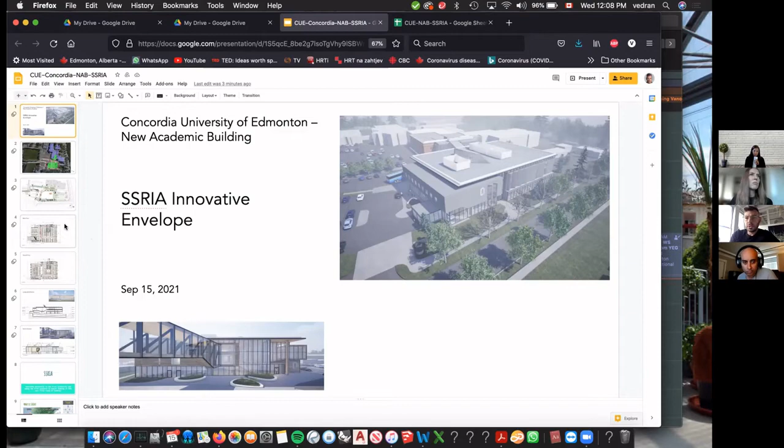Okay, so this is a project we call Concordia University of Edmonton, new academic building, and it's a building on their site, their downtown Edmonton site, right near - if you're familiar with Edmonton - this is how, I'm assuming you can see my cursor, this is how you would enter the Concordia campus, and then it would be right here on your right side.

Your most familiar entries to Concordia are probably here at the whole academic center and alumni hall and so on. So what we are working on is this NAB, or new academic building, which will be connected with this bridge to another building called Quad, or Quadrangle. And we are designing NAB.

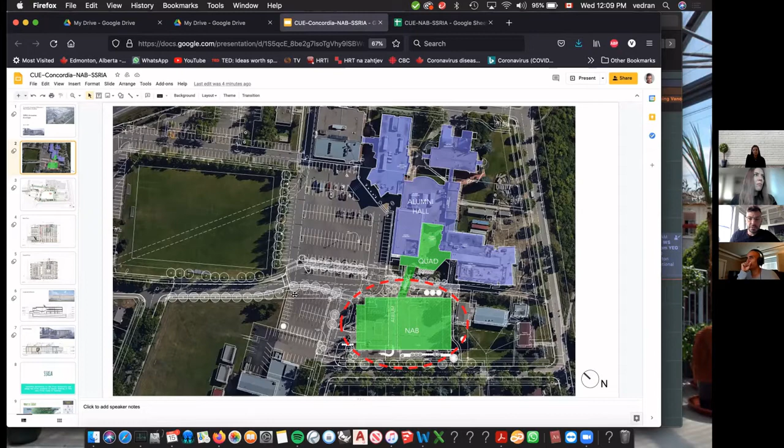Quad is designed by Neifeld Architect, who is also a prime consultant on the overall project. We are working on the site and also with the neighbors on engagements and on the rezoning of all of the site.

This is how the site looks like, and pretty much the scope of work. The building will be full of classrooms and fun places for students to gather, with bridges and stairs everywhere, two larger halls tucked in the middle that create some interesting sectional opportunities, as well as a two-story underground parkade with about 120 car stalls. The building is split level from 2 stories to 3 stories, about 12 meters tall.

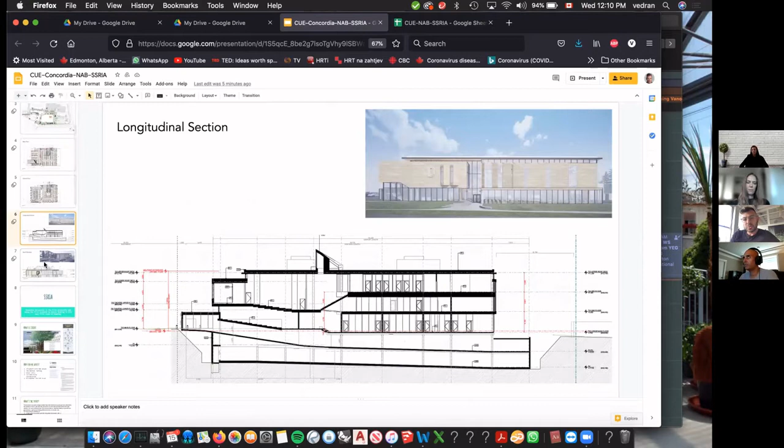Altogether it's just over 100,000 square feet. Out of that, 60% would be above ground and 40% below ground. Here's another elevation and section showing the experience of the building as you would see it walking from the main campus to the building.

So when we first heard about SSRIA, we were very excited about what this opportunity might be for the project and for the university. We knew that this might be one of the first projects to secure that round of funding, and it would be a great story to help position Concordia University of Edmonton. We should always be careful that Concordia University is another university also in Montreal, so this one is Concordia University of Edmonton, CUE for short.

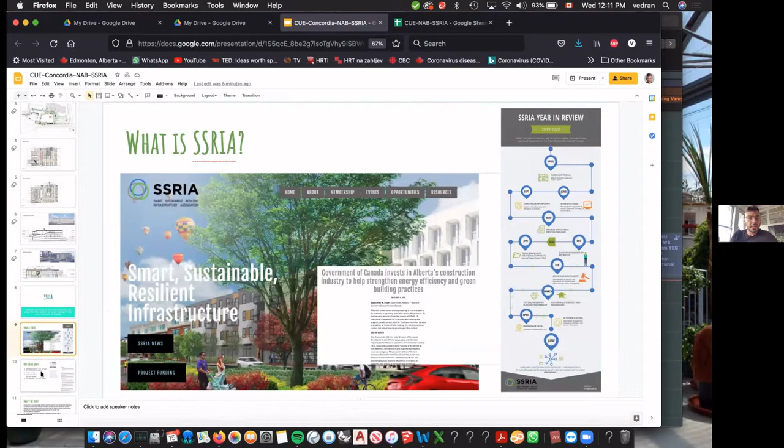They really want to position themselves as the leader of sustainable design in the community, and this is an important project for them. SSRIA stands for Smart, Sustainable, Resilient Infrastructure, and it's a non-for-profit, publicly funded initiative to support innovations with the goal of reducing greenhouse gas emissions and lowering carbon in general, as well as the embodied carbon.

Thinking about that, we needed to have a clear idea why to even apply. We need to make sure that what we are applying is aligned with Concordia's values. We understood that this would be incremental funding to improve the budget we already have to create this innovation. We knew that this would be a great story, and that it would create a lot of collaborations. It would support local businesses, and it would provide educational opportunities for Concordia to actually implement into their curriculum.

As such, we wanted to focus on the weakest component of the envelope, which is always the openings or glazing.

I won't bother you with a lot of details, but just to give you the CliffsNotes on some of the options that we were looking at. The first option was a high-performing curtain wall with integrated photovoltaic cells in addition to vacuum glass. We were excited about looking at a product we are very familiar with, that we helped launch in the market called GlasCurtain — a fiberglass-based curtain wall, which actually achieved the Passive House standard, and is one of the best performing products in the whole world.

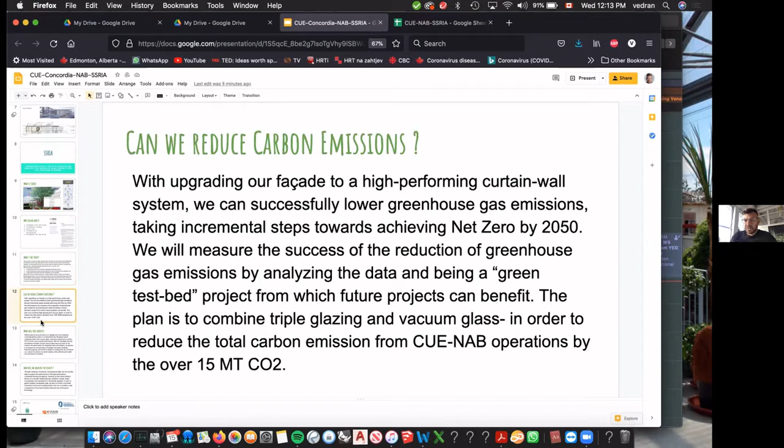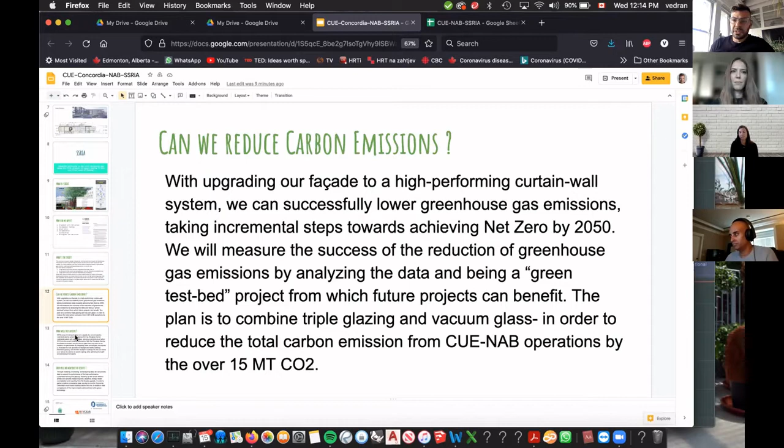Knowing how much better the vacuum glass units would perform, the biggest question was, could we get it in time? Will the client have sufficient support in maintenance? And will the price be competitive? So practically support and time, and how much would that product actually create savings or reduce our greenhouse gas emissions — as well as not to forget how much the fiberglass curtain wall reduces the embodied carbon expense on this project, simply because we're not using metal, such as standard aluminum curtain wall, for example.

So we based the performance of our curtain wall on a baseline, and for that we used two different standards. One is the basic NECB prescriptive method performance of the curtain wall, meaning if we were not to have funding, what could we get away with? Meaning there's the same story — there's not enough money, there's no budget to do something innovative, and this is not the battle we want to fight now. So let's make sure the client invests the minimum in the glazing, for example. For that, you could get away with something like USI standard values — the resistance properties factor of the assembly of 1.9, just for the order of magnitude.

What we are achieving with this product is 0.63, including the thermal bridging — that's the overall effective performance, and it's also quite substantially better than the best. Our second reference was the comparison with how well the best aluminum curtain wall system would perform on the market, and that one dropped us to 0.95 USI value.

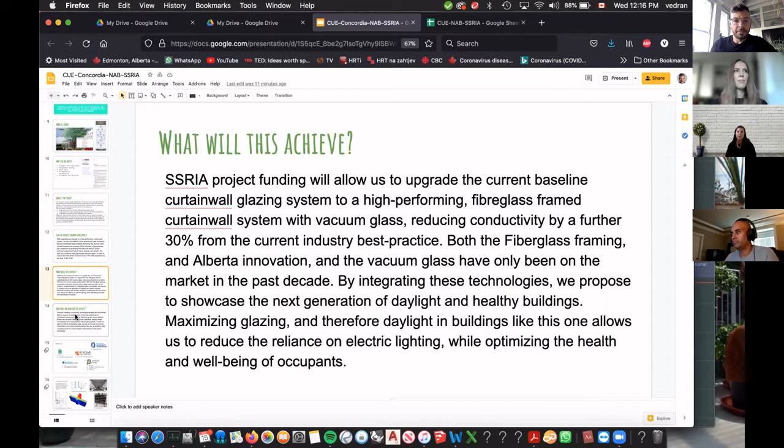So we go from something that's a minimum required by code in an energy code prescriptive method, which would be 1.9, to what's the best metal composition of curtain wall system plus the glazing unit, which would be 0.95, to what we are doing with the fiberglass and the vacuum insulated glass, which would be 0.63.

So in this journey, we have partners. Our partners at Concordia, University of Edmonton, as an owner and the educator in this process. We're working with Revolve Engineering on energy modeling and optimizing the assembly. GlasCurtain is the supplier of the fiberglass curtain wall system, and they're also outsourcing and working with the glazing trade to outsource the vacuum insulated glass, but they have to make design modifications and system modifications to accept the new package, and build sensors that will actually provide measurement and verification in the use of the building.

So we plan to finish the building by Christmas of next year. We were hoping that we would have about 6 months, but it looks like we will have just over 3 to 4 months of a measurement and verification period before that sacred date when SSRIA has a milestone and gets a renewal likely on March 31st of 2023. So we are basically promising measurement till March 31st of 2023, hoping that will get extended so that we will actually have the opportunity to do the 5-year full measurement and see how this envelope actually performs in reality compared with the rest of the building.

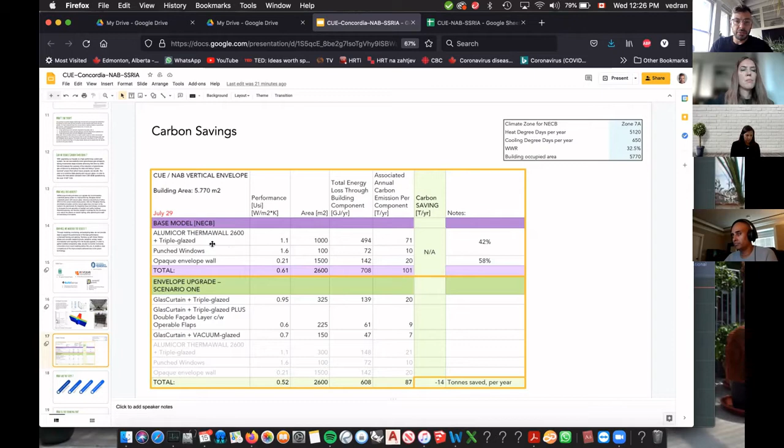Not only are we making calculations in comparison, we are also monitoring. BuildSense will place a bunch of sensors on both curtain walls to measure the performance of both and provide data and reports on what that would mean.

So we are now in construction of the building. The tender was completed in early June, and we started construction in early August of this year. It's pretty new—we're in excavation and shoring work now.

Prior to that, we obviously had a design phase with two milestones: one more schematic, and the other a construction documents phase. The fourth milestone would be the post-construction phase, which will include monitoring and reporting back.

In terms of the funding amount and its distribution across four milestones, the milestone we're in now receives the highest amount, because the highest cost is in material and labor during construction. The total is a little over $460,000, with substantial in-kind contributions, because we wanted to invest a lot of our team's time in this project to succeed—and graciously, all of our team members agreed to do so.

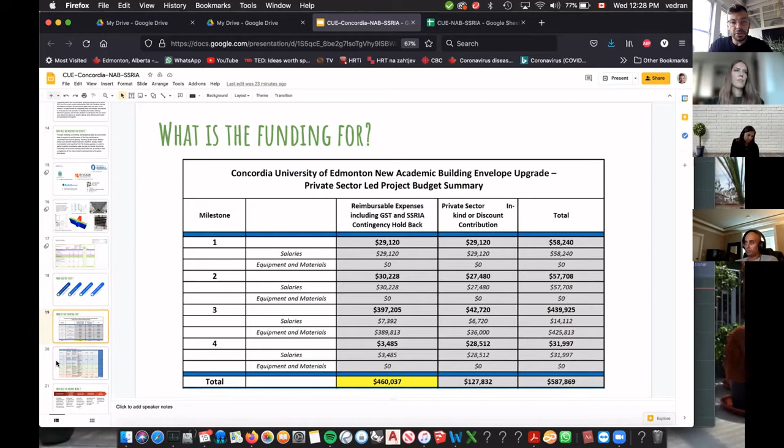There's a part we didn't know how it would go—how quickly we'd figure things out in achieving what we feel is innovation—and some of the details of what each milestone entails, in terms of activities and deliverables.

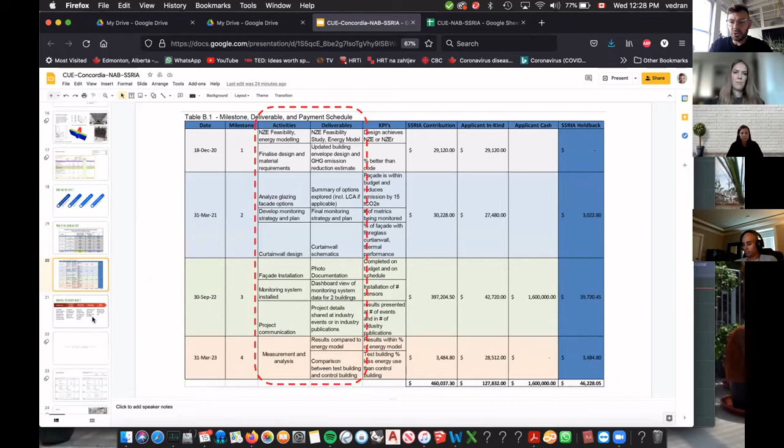Basically, in this phase we will be reviewing shop drawings and constructing the curtain wall on site.

What is newer to our process is how the actual funding will flow. We had to explain this to ourselves first, then to the client and the contractors, and figure out how to actually position this in bidding and write it up in our tendering.

For me personally, one of the biggest lessons learned relates to the specification tied to the funding. I don't know that we'd do it the same way again, simply because when we ask for an alternative price—saying this is the base, provide us the additional cost for this improvement—a lot of contractors assume this may not actually happen, and they put a higher premium than we'd like on that part. This directly jeopardizes the quantities we can use, because the funding is sealed and limited—it cannot be changed.

The performance is what it is, the market prices are what they are. Because of that, we were expecting that we would have to negotiate the quantities a little bit. Luckily, we didn't have to reduce much, and we're proceeding as planned. It will be built by the fall of next year. So I'll stop right there.

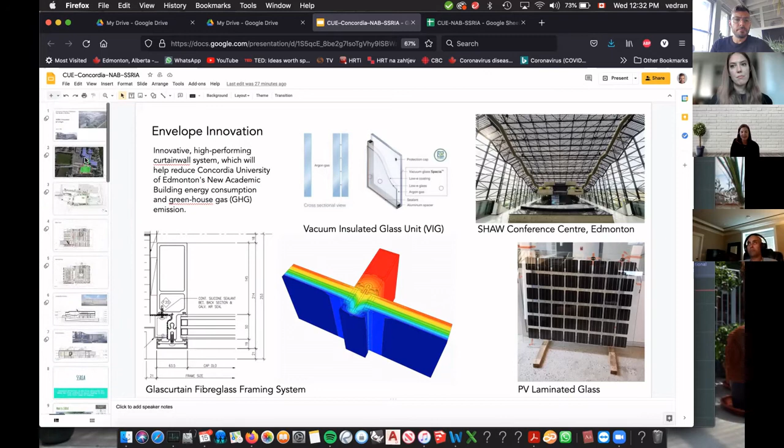Maybe while folks think about their own questions, I had a few lined up as you were speaking. I'm just wondering, Vedran, if you can share what some of the key data is that you think will come out of this project that will really help increase, I guess, the market uptake or the implementation of both the fiberglass curtain wall and VIG in future buildings.

It's better, it works better when you unmute yourself first.

Yeah, for sure. The fiberglass GlasCurtain product is no longer an innovation on our market because it's now used in various cities in different climates, further north in the Arctic, and there are six installers licensed to install it just in the Edmonton area. So even in Alberta there's now a substantial amount of installers and support to install fiberglass curtain wall.

However, we are excited about how the vacuum insulated glass will work with a product like fiberglass, because it didn't really make much sense for us to put it in a metal curtain wall. We would consider perhaps a wooden curtain wall, but not metal, because thermal bridging is a substantial concern in the performance of our envelopes.

Thanks, Vedran. I do have another question here in the chat. So do you know what the overall U value was of the curtain wall itself, and how does that compare to the typical metal frame, triple pane curtain wall? And then again, same question on the cost - what is the difference in cost between this assembly versus that typical triple pane aluminum curtain wall?

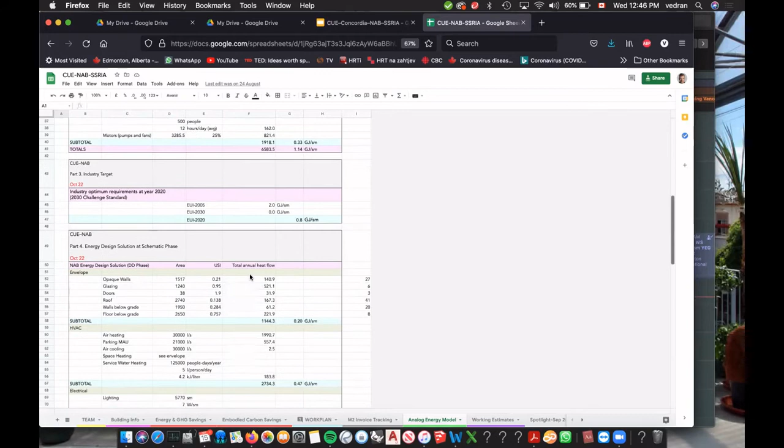Yeah, for sure, that's a great question. Before we even started with more enhanced, more sophisticated energy modeling, we always do our analytical version, our whiteboard hand-sketch version of energy modeling. Basically what we came up with for the overall performance - can you see this spreadsheet? This summarizes the performance of what we briefly chatted about.

I think it's always important to frame the question and response in what it relates to. Our base model - in this case I'll repeat, we have two base models. One base model was what we consider the absolute minimum that needs to be built to meet the codes, which in description is aluminum framing and triple glazed units, for example. There are other ways to achieve this, 1.1.

And then there's an intermediate base model, meaning, well, if anyone ever raises the question, why didn't you improve the metal curtain wall, and do you have an idea how good would that perform? When we did that in the past, we completed a college in High Prairie that actually has metal framing with triple glazed units, which performs at 0.95 USI value.

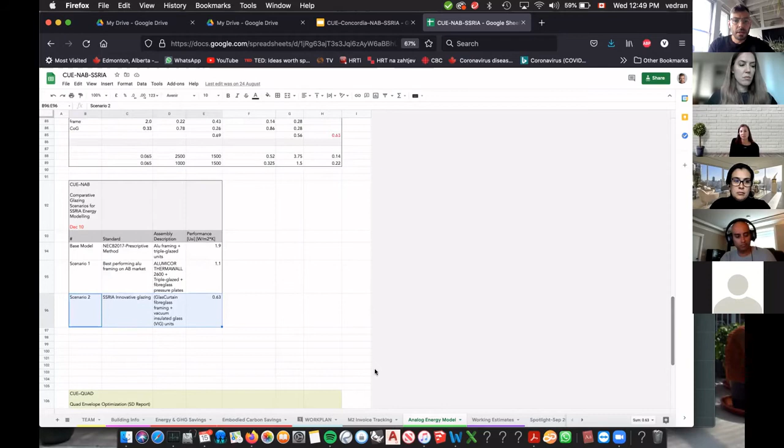And then what about on the cost question? I know you said at the beginning of the presentation that you're already seeing costs on the VIG specifically starting to come down. Yeah. But how does that compare?

Yeah, so this is our working materials, the live materials our team is using to do our rough and more detailed calculations before Revolve Engineering goes and does their own more enhanced energy modelings. We're doing quick checks to understand approximately how much area we can afford and still be within the funding.

For that, we had GlasCurtain as part of our team to research the vacuum insulated glass market, the cost of it, and provide the overall cost of what they think the tender upset amount of this innovation will be. The base curtain wall we are using is Alumicor Thermawall aluminum system with triple glazed units, which came into tender at $1,000 per square meter.

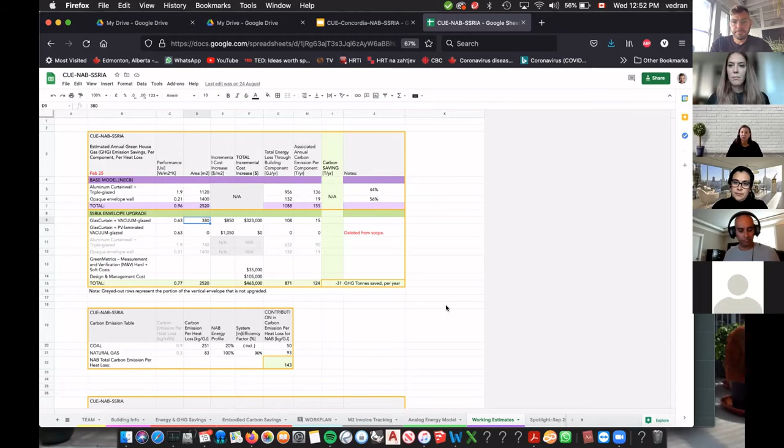We definitely accept there are additional costs involved when you're a leader, one of the first to start using a product. I think it's really great to see that the cost of this product is already coming down, opening up the opportunity to accelerate adoption of this particular product, as it shows good energy and GHG reduction potential.

Is there any other questions? We have just a few minutes left. Any final questions from anyone else? Hey Pam, I had a couple of questions for Vedran. Vedran, thanks for the talk.

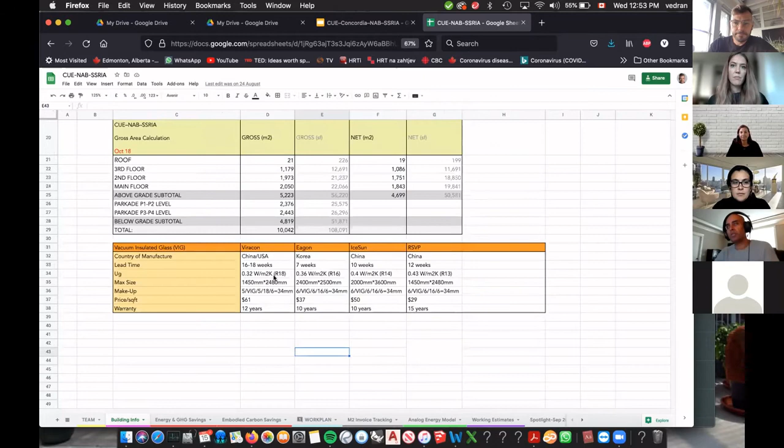A couple quick ones. In terms of any glazing system, it's always about the seal and the ASTM spec. Also, is the assembly stick build? Is it unitized? And what would be the floor limitation in terms of how high we could go? Thanks. Oh thanks, Kamal, all great questions. I can tell you've been around. You know what the concerns are out there in the market, and seals are probably the biggest discussion we had in terms of what is the potential failure of this system, other than other maintenance concerns.

The seals - we don't know until we use it for 10 years, that's the short answer. However, I hope you can see the spreadsheet with the 4 manufacturers we looked at. This shows how much warranty they provide, and it's more than what they provide on a triple glazed unit, even though it's a new product. This gives us the biggest confidence - when suppliers say, well, we believe in this, we believe this seal won't fail, this vacuum will not get out and void the warranty. And if it does, we have the warranty.

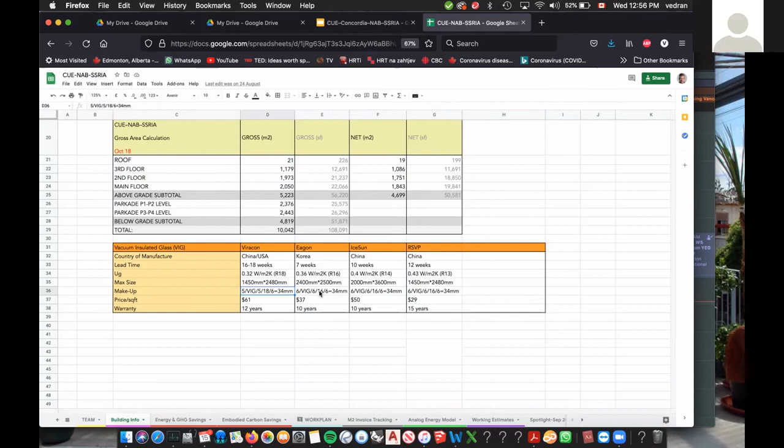The other question is, is it a stick build? Is it storefront? Is it unitized? Oh yeah, sorry, the second part of your question - sorry Kamal, thank you for the reminder. Yes, it's absolutely a stick build.

Most of the curtain walls that we built are stick built, in both fiberglass - GlasCurtain doesn't have a unitized version - and aluminum curtain walls that are unitized are typically pricier. However, there are products out there that are unitized that we liked for their seals.

We're actually working parallel to this on another innovation that may or may not ever get applied for SSRIA, which is the unitized aluminum curtain wall detail combined with mass timber unitized framing for curtain walls and VIG units. So we're trying to do all of this in this other world - the unitized world - of curtain walls, which we know can be built in a different way at different heights, and typically preferred for high-performing towers.